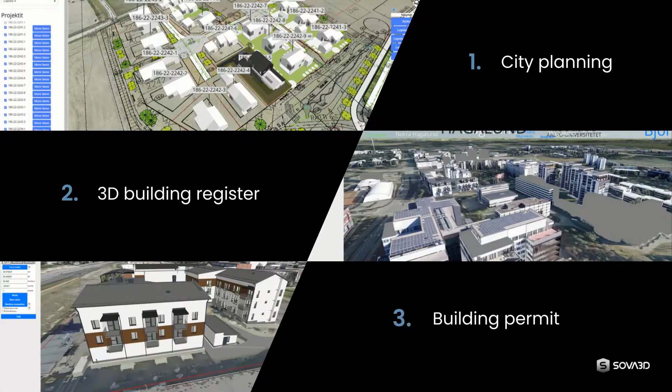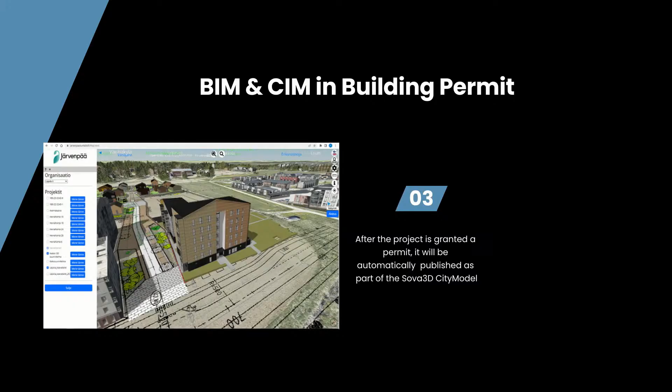SOVA 3D is a platform for city information modeling, and this is how the process works. First, apply for an e-building permit at Cloudpermit Service. Second, upload IFC models directly on the plot. Third, after the project is granted a permit, it will be automatically published as part of the SOVA 3D city model. Fourth, anyone interested in the city's development can follow the progress, like neighbors, investors, tenants, and others.

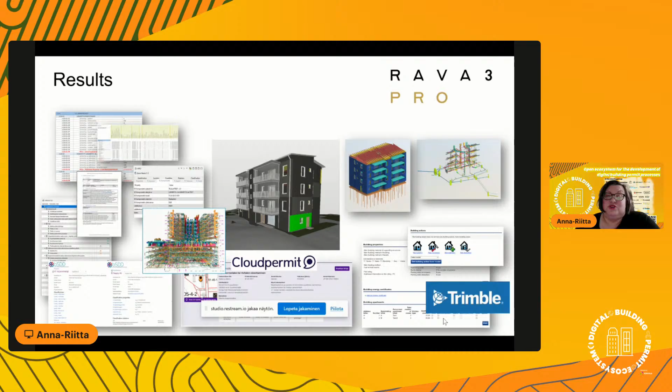I can say that the first step we did was recognizing that the working mode we had in Rava 3 Pro project, where we have all kinds of stakeholders working together - municipalities, specialists, software companies, construction companies, associations, all kinds of stakeholders that we have in this industry.

We make these results together, and we wanted to continue this collaboration work, because we noticed the work is not done yet, the old work - we need to develop more, we need to discuss, we need to learn each other's projects, we need to do things in the future step by step.

So we established this building permit ecosystem that Teemu mentioned earlier, and we have also opened it for global members. We will publish a newsletter also in English, so you can order this newsletter if you like - maybe some of you have already ordered it when you registered for this event, but it's still open, and you can join.

This has been really good for our processes, because we could continue this work together, and I'm hoping we will get more members, and get this kind of process culture that we have - joining together and being practical, while at the same time doing the research part, and working with the new building act with the ministries. Also these global connections, being part of the EU BIM Task Group, are very important, I think, for all of us.

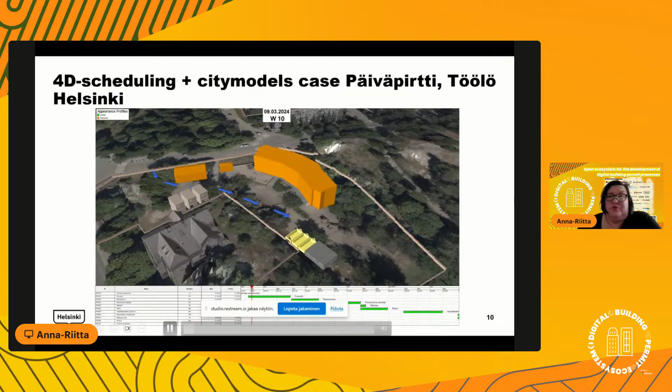So I will shortly show this material we have made. I will share this. This is the 4D scheduling part we made as pilots for communications to people, to municipality members who don't know about building - they are not building specialists.

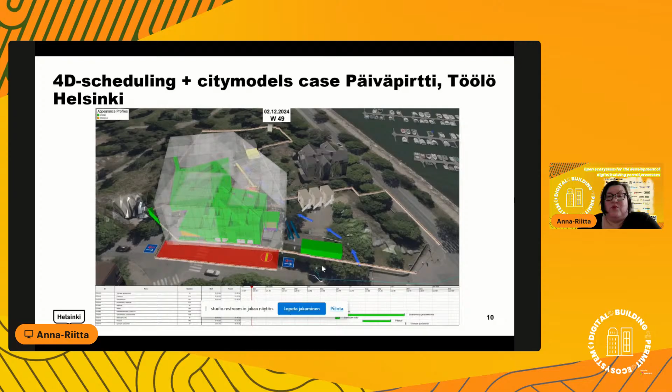This is something we tried for communications: through these IFC models and city models, we made this 4D scheduling about construction site changes, and also how the traffic will change, what type of movements it will make into the environment people are living in. This is the City of Helsinki Töölö area project that we are doing.

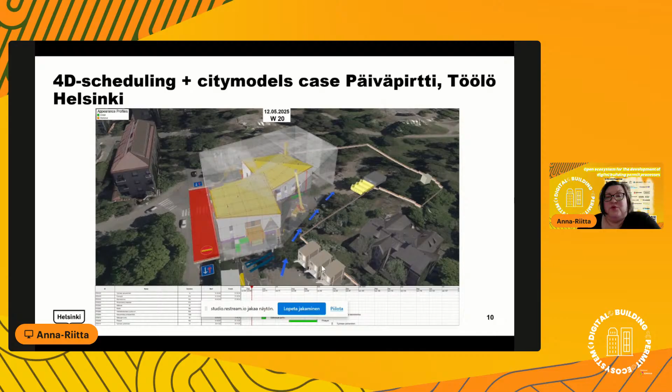All these kinds of practical pilots we made last year, and we will continue these types of pilots this year. You can watch this video later - I will send it afterwards.

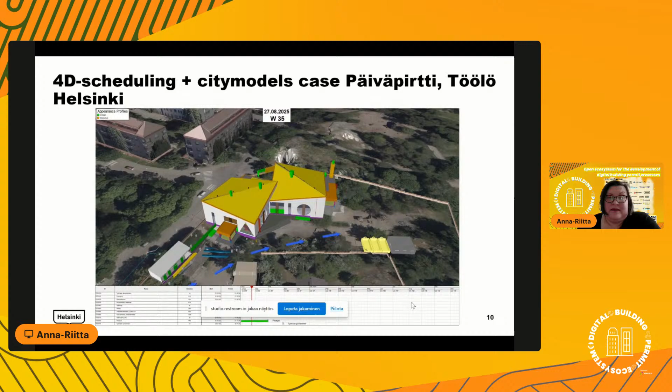We are also working on digital twin experiments in the Helsinki Urban Environment Division, on how we can more easily implement these IFC buildings into city model environments. There are also new softwares that have been confirmed, which we are going to use, and we will make new pilots from this digital twin perspective in City of Helsinki.

This is Tiina Talvitie's slides, which I promised I could show you.

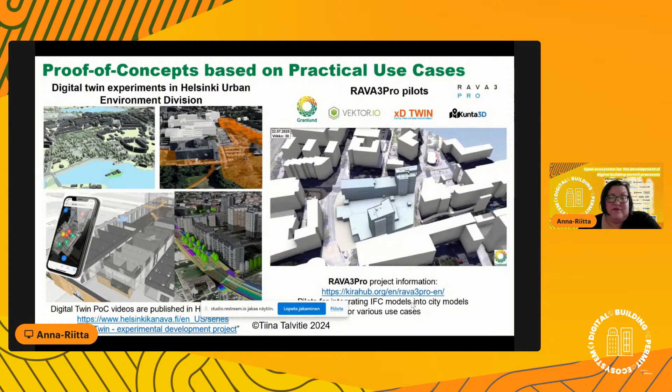For the next step of this project, this KYMP R3, we decided in Helsinki that we will invite other municipalities to join this implementation project, because we wanted to have this IFC files automatic checking process ready and for public use. We made this municipality group with City of Vantaa, City of Järvenpää, City of Hyvinkää, and City of Tuusula, and we are doing this implementation testing and process validation together with Cloud Permit and Solibri.

We already made the user interface and reporting design for these Rava 3 Pro projects, how it will look and what kind of functionalities it should have. We had this part ready, but Cloud Permit has by themselves made this concept ready in their software.

For example, we are checking accessibility - if we have requirements for a toilet or something else that needs to be accessible by wheelchair, the software will check this automatically. We just put the IFC files in, and we automatically get these checking rules out as a report. These checking rules are based on our Rava 3 Pro use cases, which are based on the regulations and law - what our law says about accessibility, for example.

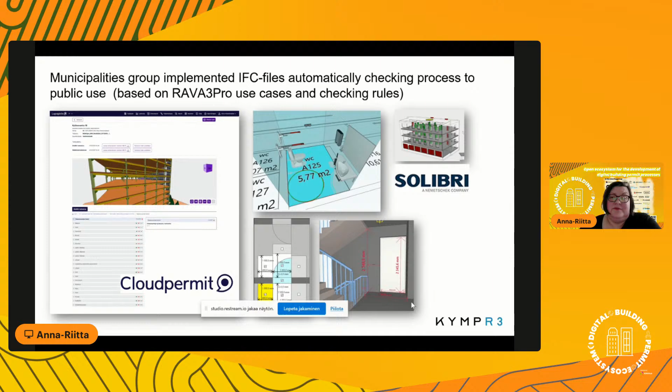This is quite new in Finland, and we are very happy that we have this ongoing and we could make this true now. This was our goal in the Rava 3 Pro projects, and now the first phase is ready. We're hoping, of course, that we will have other municipalities, and Trimble is also working with their municipalities on how they will do the same and use IFC files more and more, because the Building Act is going to be guiding us to do that.

Then we have the national next step, Rava 3.5, as we have used for the working name. We have a few cities, Järvenpää, Helsinki, Vantaa, Tampere, and Mäntsälä, whose building permit units are responsible for guiding the building permit process in this. And this is funded by the Ministry of Environment of Finland.

Our goal is this because the Secondary Building Act gave us extra content for the requirements, because there's information that we have to provide in machine-readable form via IFC files. So we have to make property sets, necessary codes, descriptions, pilot models, and of course a new process model for this update for the extra content.

I think we will have a first version next week for the public hearing phase, and I hope that we will have the pilot models ready by August, so we can use them. All of this will be open, free, national-level material. We have a very large group of stakeholders guiding this project, like we did in Rava 3 Pro. And we are also making guidelines for national use.

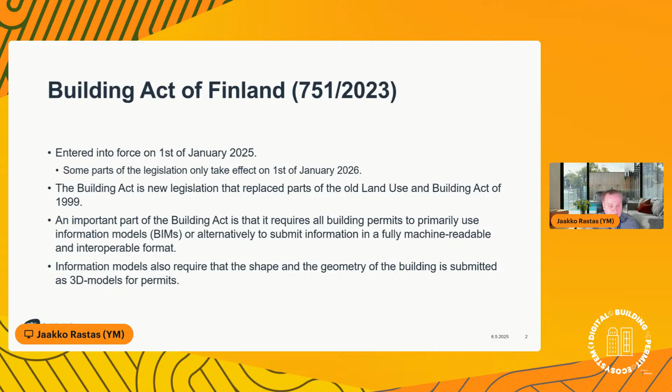Traditionally, the building industry has been very 2D focused, but now the legislation requires that we go to 3D. As you may have guessed from the 2026 timeline, Finland is a bit behind everybody else, but we're catching up quickly, and we hope to be quite modern in our BIM-based building permits. So a few words about building permits. Building data is created mainly in the design and construction phases, and that is why the building permit is crucial for gathering valuable data about the built environment.

Our legislation requires that when you apply for the permit with the information model, you also have to keep it up to date. So after you have finished building parts of the building, if something has changed, you are required to inform the relevant authorities. The BIM model, made for the building permit in an interoperable manner, effectively conveys the necessary information to the authorities. Our baseline is that when authorities ask for information about the construction project or the building, you only need to submit it once.

Currently in Finland you have to submit to many different authorities in many different phases, and that can be 14 to 20 or even more than 20 times that you submit the same information. So submit it once, maximum twice if something changes, and it should be all done. That is what we are aiming for. Getting the necessary information to the authorities facilitates their processes and thus also benefits construction projects. The tax office always has the correct data and can function correctly. The rescue authorities have correct information if something happens. This way we're forming different data repositories in the permit process, which enables wider utilization of the data.

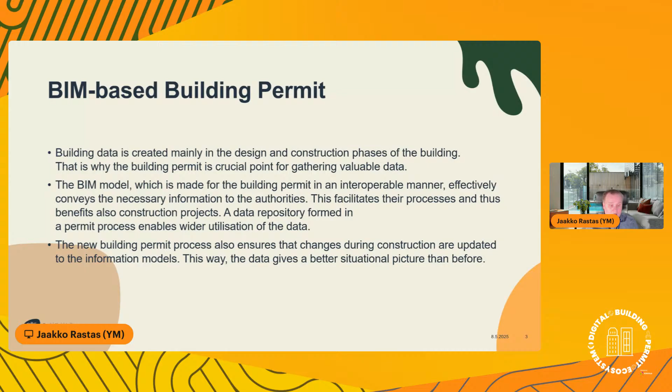The new building permit process also ensures that changes during construction are updated to the information models. So we should always have up-to-date information about our built environment, which leads to a much better situational picture than before. The Building Act regulates how to apply for building permits. The Act itself is quite simple on it, and it sometimes leaves many questions for construction companies, industry specialists, designers, and everybody else. As such, the Ministry of Environment is currently drafting a regulation concerning the required information and required formats of the information models.

Basically, in this regulation, we're going to take a look at what are the absolutely necessary core data that always need to be part of the building permits. And this new regulation is expected to take effect on 1st of January 26.

Currently the initial draft for the regulation has gone past the public hearing phase and is currently being finalized before being submitted to the EU Commission notification, after which it will be finalized in Finland, and then it will be given in the fall time, so it will take effect on the 1st of January. Due to the EU Commission notification process, the final regulation draft should, however, be ready already in this May or in June at the latest.

So I mentioned before, as did the previous speaker, that the building permit can also be applied for with just machine-readable information. And this is perhaps something that is going to be a bit different from the so-called old ways. We are very strict about what is machine-readable and what is not machine-readable. So we have a separate regulation about what machine-readable information is and what is not, and we exclude any and all information that is gathered, for example, with scanners, with OCR, computer vision, AI, or such technologies. And we have separate articles about that.

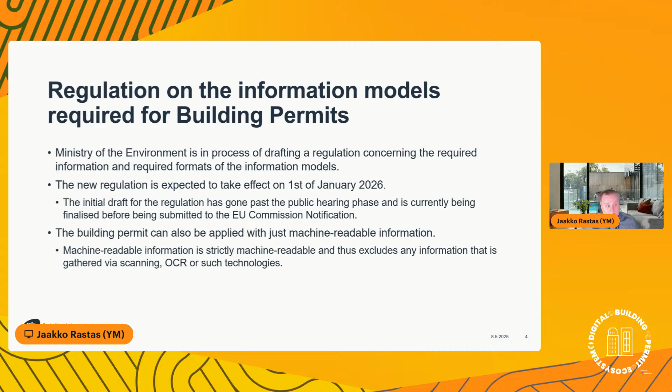As we have discussed today, is IFC required or not? The Finnish law itself does not require IFC. We require that the information model is in an interoperable and machine-readable format. And as such, the Ministry of the Environment has proposed IFC to be that information model format, so that not just the ministry but municipalities and other authorities in Finland will require the building information model to be in IFC format. Currently, in the draft regulation, we propose that the minimum version for IFC will be version 4.3.2, which is also an ISO standard.

We are fully aware that 4.3 is quite new, and we are well aware of some of the troubles because we're going for such a new format. But on the other hand, the vast and better documentation and the interoperability with infrastructure building indicate that 4.3 would be much better. For legislative reasons, we are unable to support older versions like 2x3.

Of course, after hearing my short speech about these things, you may be thinking, oh no, more codes. Are we going to have a similar situation as with Eurocodes or something else that is locked behind some kind of paywall, or are we required to use some random software? I'm happy to announce to all of our international guests that we are very, very committed to interoperability and open standards. So everything regarding our information models, alongside the previously presented Rava 3 Pro, all of our terminologies, the data vocabularies, aka the information models, as well as reference data, are all open and freely available to anyone. There are no licenses, there are no paywalls, so it's all open data.

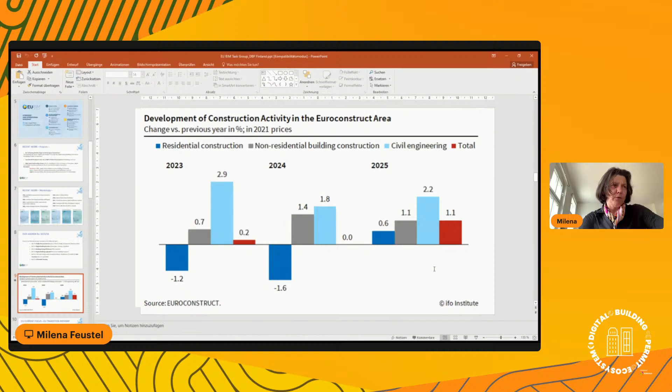Well, if we see what the EU BIM task group or the Commission specifically did for the digital building permits, I can only refer to the outcome of a study which was commissioned and procured by DG GROW. That's one of the Directorates-General, which is a member of our EU BIM task group, where we worked on the advisory group and actually did a lot to support this study. And this study had 3 pillars, and the second one was the one that really had to prove that the building permits across all member states should move forward.

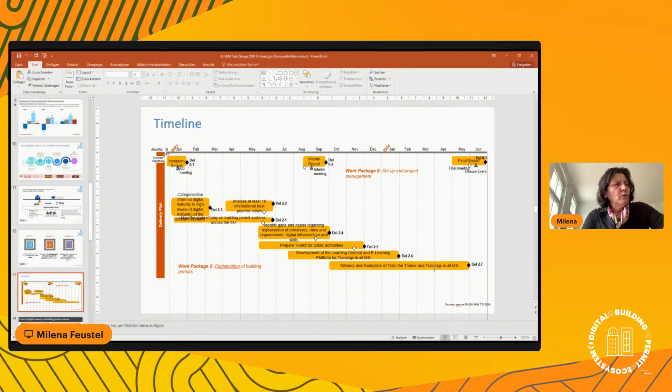So this is just one slide to show the different packages for this topic only, for the second pillar, because it was very ambitious, and it included different research on the current situation in the member states, or what we can do to move forward to get a common understanding. And one of the outcomes was to have these 4 levels. So now we have a common classification of the levels for digital building permits.

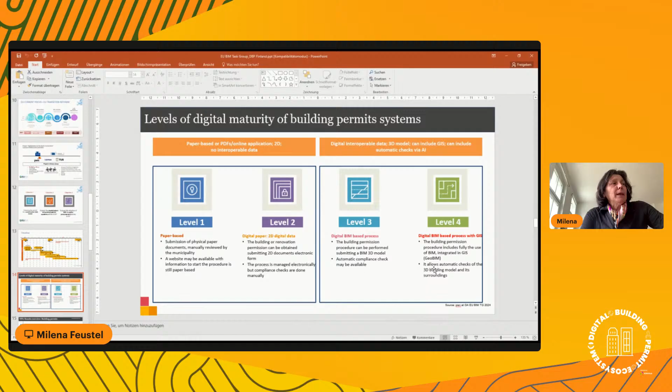And you might know already, level 1 is just paper-based, level 2 is PDFs and using electronic communication, and 3 and 4 include BIM. Level 3 would be only BIM and maybe partially automated checks, and level 4, the best you can get, is BIM and GIS, and then of course automated checks and reports. So this is what we have throughout Europe, and this is the list of the countries.

The 6 front runners in Europe are, as you might know, Austria, Estonia, Finland, Germany, Netherlands, and Spain. We also had some international front runners named here as well. And it doesn't mean that they all have level 4. I think some of these countries are still on level 3. But the good thing is there are front runners, and they can share their knowledge with the other countries, which is one of the things we want to stress and to profit from.

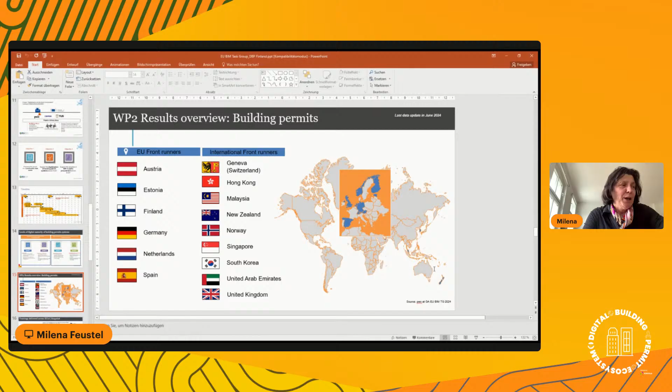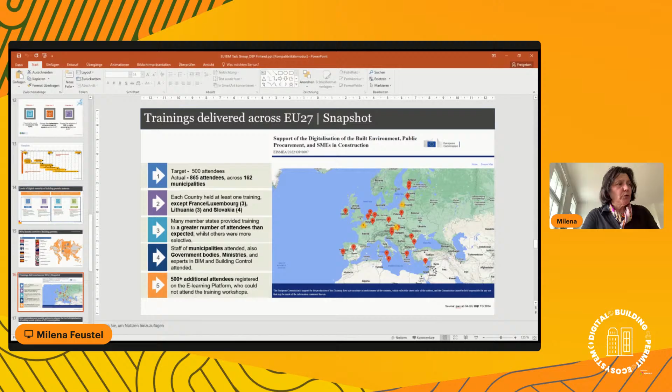And therefore, we did trainings across the EU. This is very standardized and basic training, so we all have the same understanding, and the Commission paid for those training sessions, and there is also a toolkit available, which I'll explain a bit later. But first, I want to share with you the main conclusions from this very ambitious project, and it was quite clear that an electronic system should be, of course, at the core, the platform for digital building permits.

But other conclusions, for example, financial support for the municipalities for getting good software and hardware, should be very important and should be considered too. Then there should be some kind of a vision or a target. And here the Finnish approach was specifically quoted, where Finland's Ministry of Finance and Environment has launched a project, the project we heard about, which aims to adopt BIM across 33 municipalities. So you had a very scalable and successful approach, which is a recommendation for all European countries. So let's see how we can follow your advice.

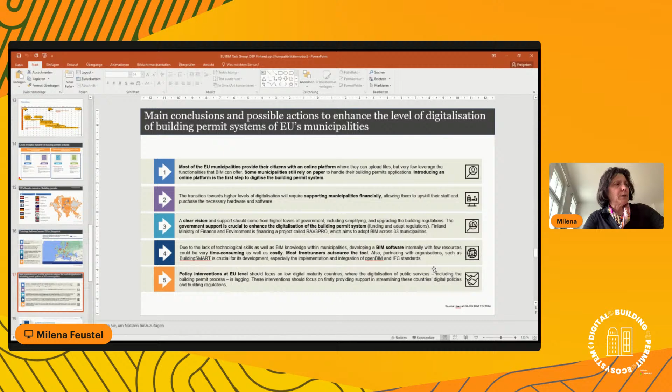The next recommendation is open standards and software requirements, or standardization of such requirements, so that we don't have to start from scratch every time. And the final conclusion was that EU policy intervention should go only for the least performing countries, and the others should learn from each other, which is quite plausible. I mentioned the toolkit, it's available. I'm sure in Finland you don't need it because you're an advanced country, but I think it's quite helpful to have a general understanding and, as I said, a basic tool for everyone.

What the Commission also does is it supports financially and also in kind these very important projects where we work on research, on new tools. It's quite interesting to see how the universities or the technology and research companies want to support this very important part. I recommend you go on these home pages and check the results.

It's quite promising. So from our point of view, from the European BIM task point of view, we have these four sectors, and we want to combine them and make the best out of it. So when it comes to rules and processes, we think there should be a simplification process to get the basic requirements and rules for checkings and for a construction platform and for checking tools. And I think if we all have one simple setup, which can be easily expanded or adapted to the national requirements, but a simple core setup, that would help a lot.

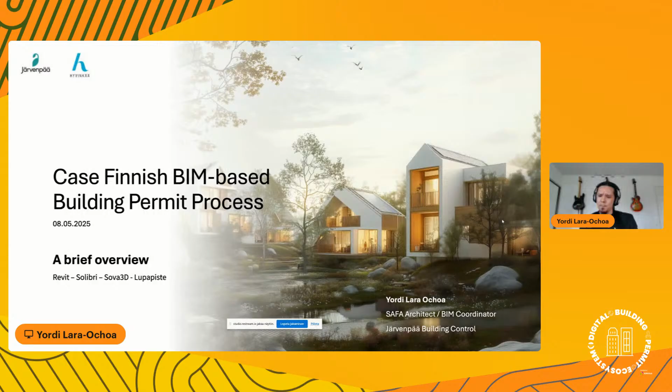The overview that I will show will be a small project. It will be a typical wooden house in Finland, from the very start to the end, until the point where we want to implement this technology.

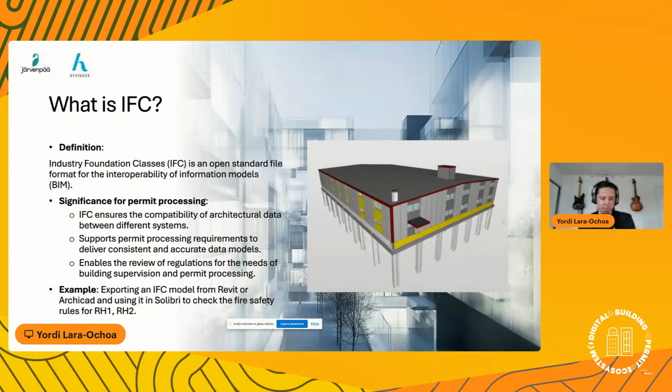Of course, now we're all familiar with IFC - we know what it is, but IFC is the heart of our process. So everything depends on how good the IFC model is made. And here I emphasize the quality of the property sets, the quality of the geometry, the quality of the materials, and of course that there are no inconsistencies - so as clean as possible.

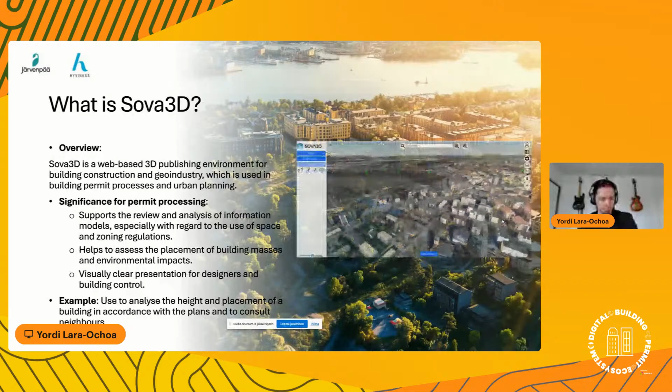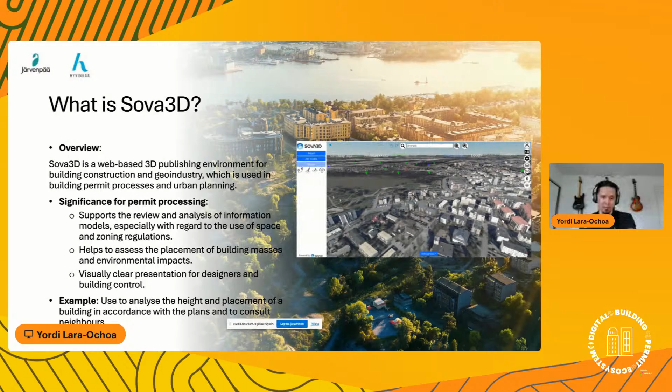So the second thing we saw early in the presentation was SOVA 3D, which is our 3D mapping interface used extensively here in the municipalities that belong to the pilot project in Finland. SOVA 3D is, let's say, like the eyes of the project. If the IFC is the heart, then SOVA 3D is like the eyes, because we can see with precision in 3D where we are and where the plot is, and so forth.

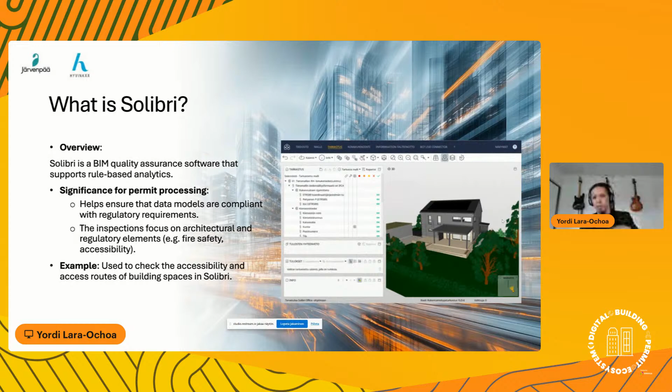Then Solibri is like the nerves, and let's say the brains - all the nerves and instructions that come from the head. So that's Solibri, at least - I'm making a bit of a physical metaphor here. Solibri might be a familiar program to some of you; it's used mainly in clash detection details of the project. But here in the building permit process in Järvenpää, we've kind of hacked it. We use it to provide a very precise analysis comparing the rule sets, what's permitted, what's not permitted, and then we give back reports to the designer so that we can go forward in fixing the pending things. This process flows much better if we do it electronically with Solibri.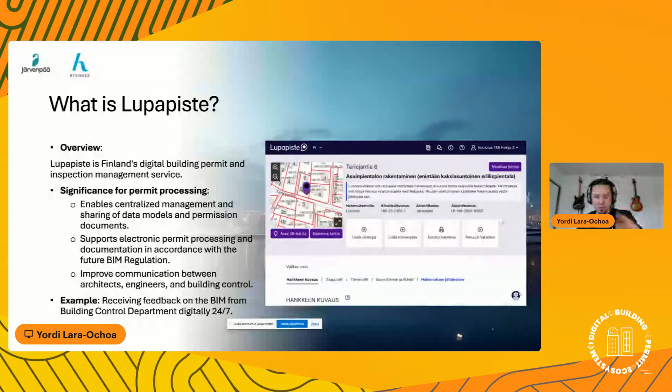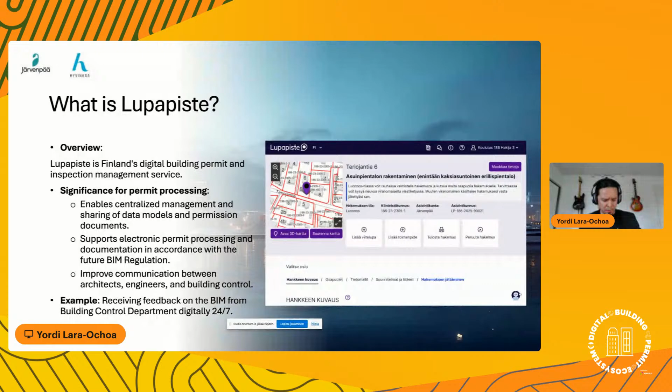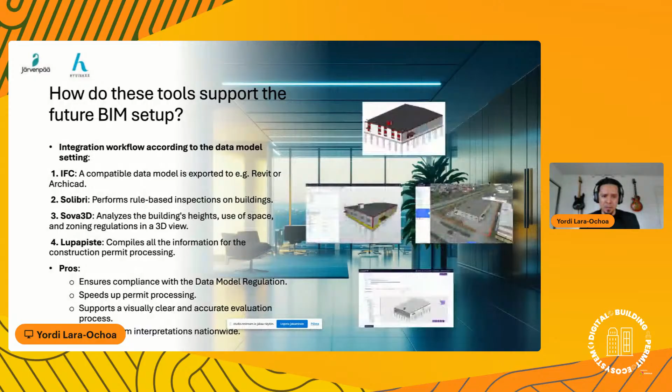Then Lupapiste - let's imagine that it's the body. You have the eye, you have the heart, you have the brain; Lupapiste is the interface that we use online. I will go deeper into this in the second part of my presentation. So those four elements are what we use extensively: IFC, then Solibri, then Sova3D, and then Lupapiste. Those four elements are, in a nutshell, what we use here.

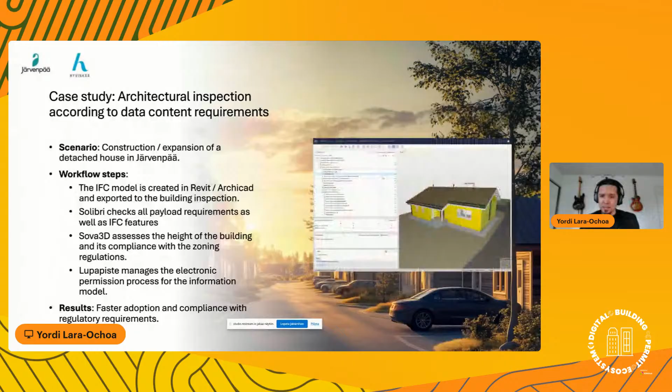The case study, as I explained, will be this small house. And then the key benefits and all these kinds of advantages - I think my colleagues already explained them, so I'm going to skip them now.

I'll skip the challenges since they've already come up repeatedly. So let's go right into this very important thing: the property sets.

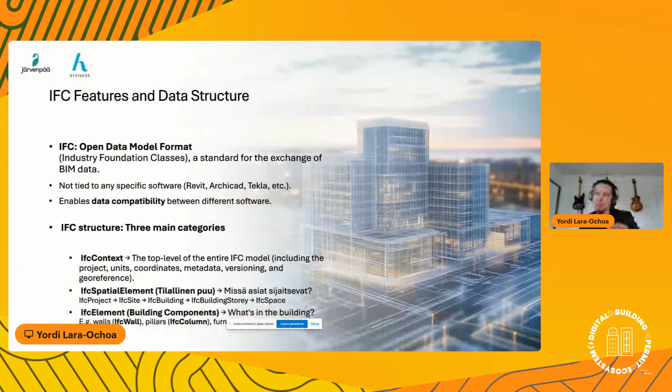For those not familiar with property sets, it's the core—it's like the blood cells of all the projects. If the property sets are well done, then everything flows. So we need to know with precision where to put those properties in the IFC model.

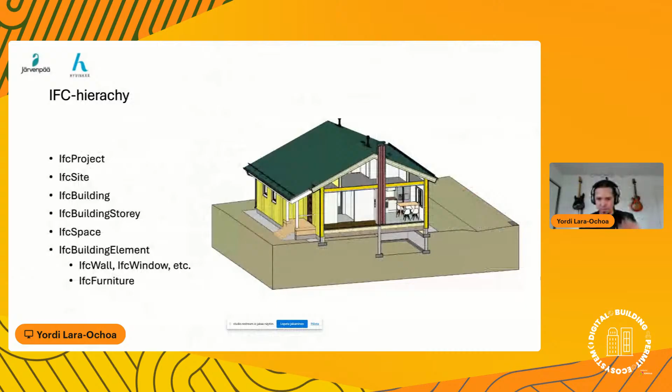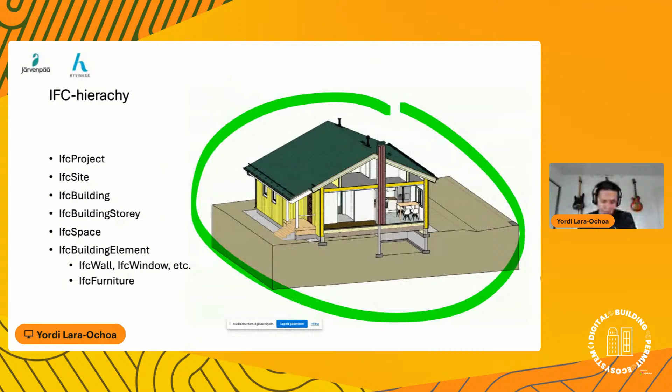For that, the IFC hierarchy is super important. For some it's a familiar thing, but for those who aren't, I can show this graphically super fast. In the IFC hierarchy, we have several levels.

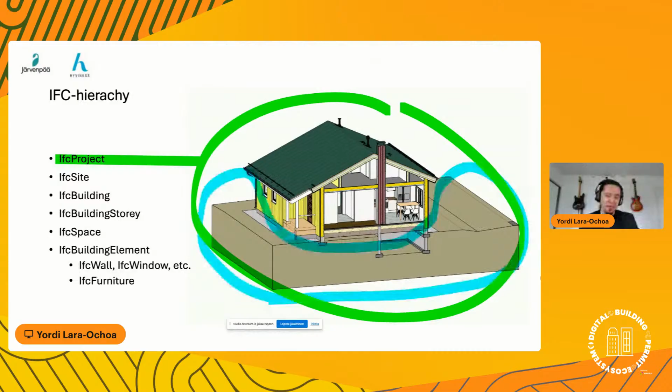The uppermost level is the IFC project level. Then we have the IFC site level, which is the piece of land, the plot. Then the building, then the stories, all the floors, then the space. We're going from the general scale to a smaller scale, going deeper into smaller elements.

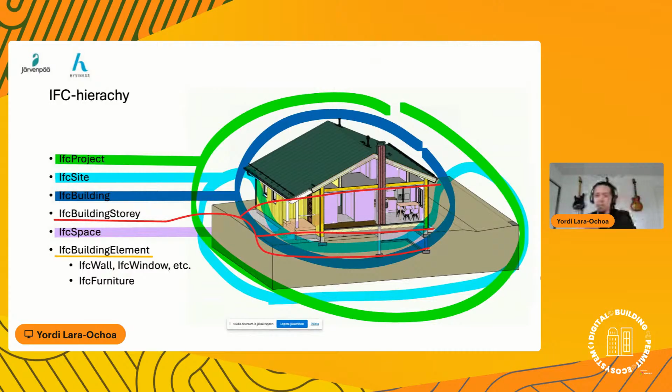At this point we start with the concrete elements, because the previous elements are abstract—you cannot touch the story, the space, or the building. It's like an entity with no matter. But from the IFC building elements onward, everything is physical, like the walls or the windows.

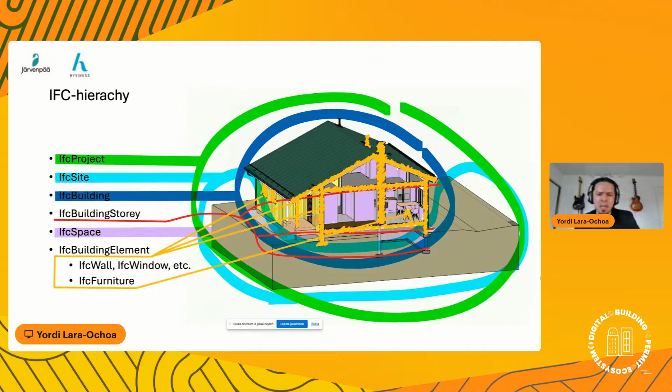I want to make this very clear: all the elements like the foundations, the floors, the ceilings, the chimney, all the furniture—these are all in the lowest IFC level of the hierarchy. So it's super important to know where the information goes; we have to deploy it with precision, whether it's IFC site, IFC building, IFC space, wall, or door.

You see, it's the same hierarchy, but now as text. And yeah, basically that's what we do.

Now I'll show super fast one simple element: the load-bearing capacity of a wall, for example. The type of information we're putting here—in Revit it's a parameter, but in the IFC world it's a property. It's exactly the same. In a moment I'll show you how we can do it in Revit. So the property is 'load bearing,' and the type of information is a Boolean.

So it can be a yes or no, false or true. Then we can get a collection of properties into one group—that's a property set, an IFC property set. For those not familiar with this, it's now mandatory to get used to this terminology.

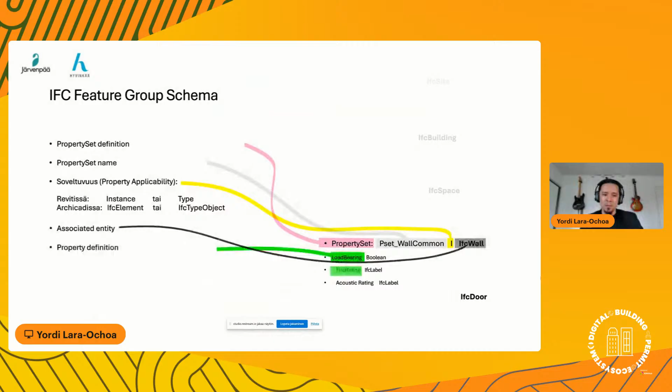After you have your property sets done—I'm going to skip this, these are only the parts, how they are named, the parts of a property set. But let's go really quick because I've already explained them.

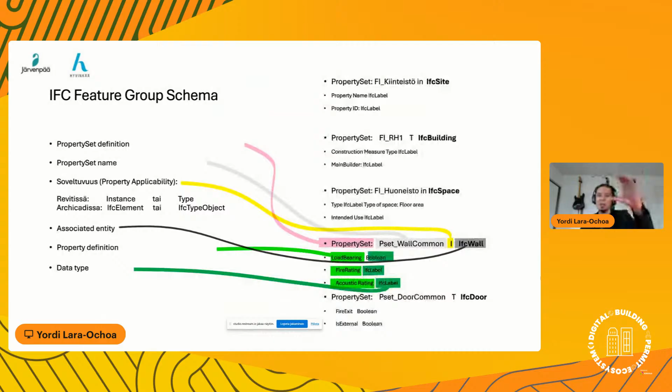After this, you have a collection of different property sets, for example in the IFC site, or in the IFC building, IFC space. Everything will have different property sets. Having said so, we have to place them.

After this, you will succeed in creating property sets. The principle is exactly the same for ArchiCAD, Revit, Plan, Vertex, or whatever. The conclusions, I think my colleagues already explained. Now I'll jump right away to Revit.

The proper way of placing properties is through shared parameters here in Revit. For example, I will go to shared parameters. Here in the shared parameters, I have already made a collection of several aspects of the project. The relevant aspects of the project will be deployed here.

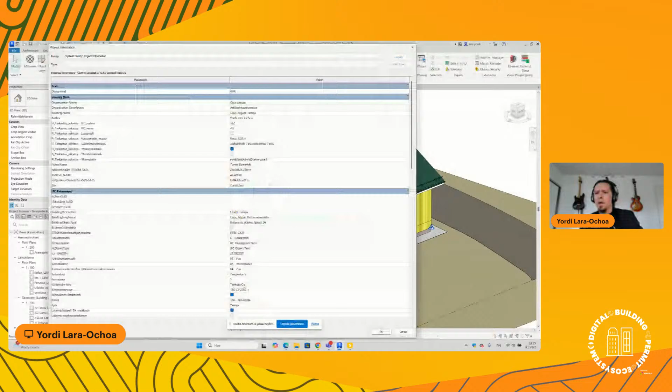It's exactly the same. So after that, we will place them, for example, in project information, and then we have all the data gathered in a certain place. For example, the check boxes - they are the booleans. So this is yes or this is no, and so forth.

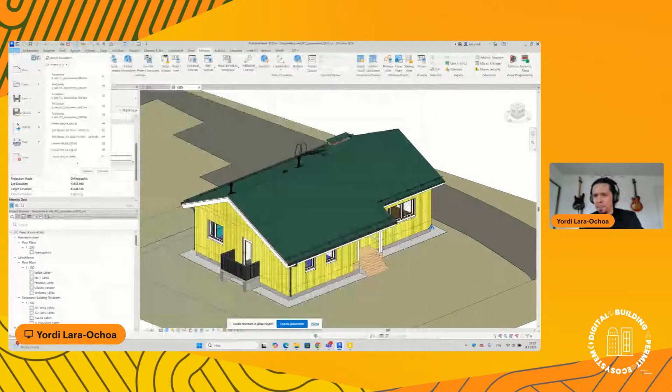Then after we have this done in the export interface here in Revit, in the IFC window, it's super important to assign the right parameters in order to export them. Less is more - the cleaner the information, the better.

So having said that, here we have the property sets. I personally like exporting the IFC common property sets because you will have the common wall, common door, common floor, and there are important values that will go there. And also, this is very important, the user-defined property sets - these are the custom property sets.

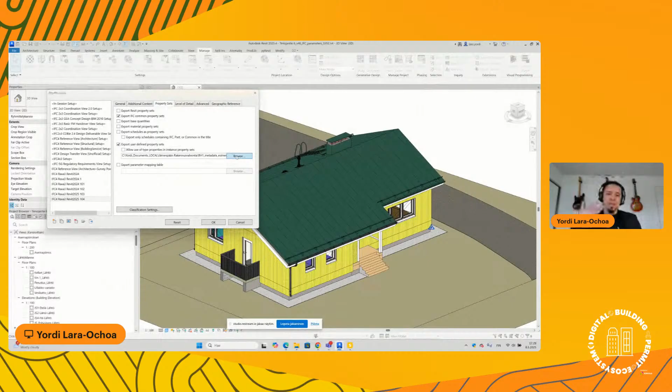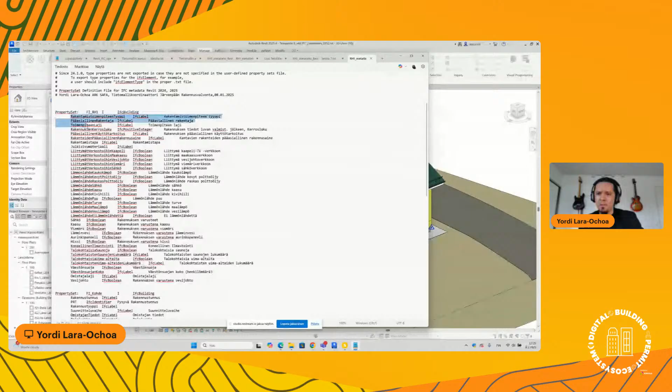So we will see, for example, if I open this file, which is the reference file, how it works. We have exactly the same structure as I explained: the property sets, the name, the level of the property set, and all the properties inside this group. Same with, for example, the PRT code, or the designer, or where the building is located. So all of them have a certain IFC hierarchy level to be deployed to.

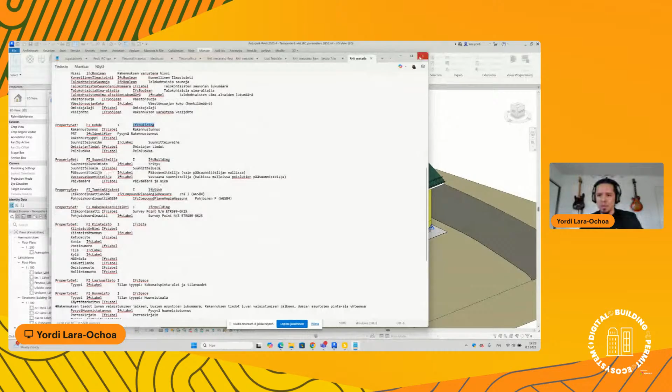Then after this, when we export to the project, we go really quick to Solibri. Here we have the IFC exported, and then we can check really fast that the properties passed from the Revit environment to Solibri.

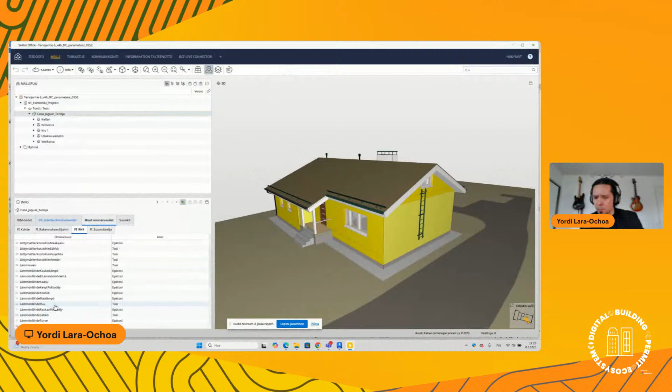For example, here we have the FI_RHI, and if we see, yep, this is how the house is warmed - so it's electrically warmed, or it doesn't have a wooden place or a chimney or something. So all the values are here. Everything passes properly using this technique.

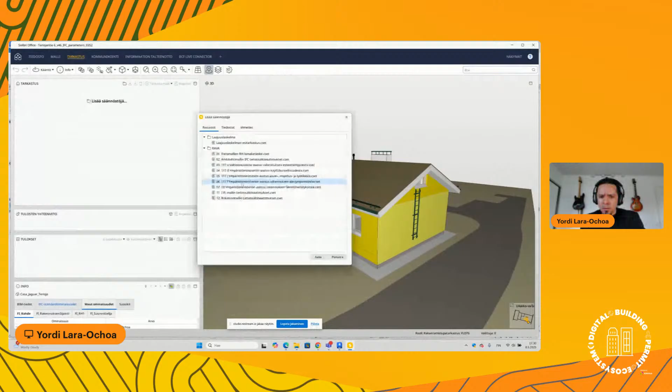Then after this, we can make a very quick check so that the rules are correct, or if there's something wrong with the model, then we can fix it. I'm a bit over time, but I'll try to wrap this up in 3 minutes, something like that.

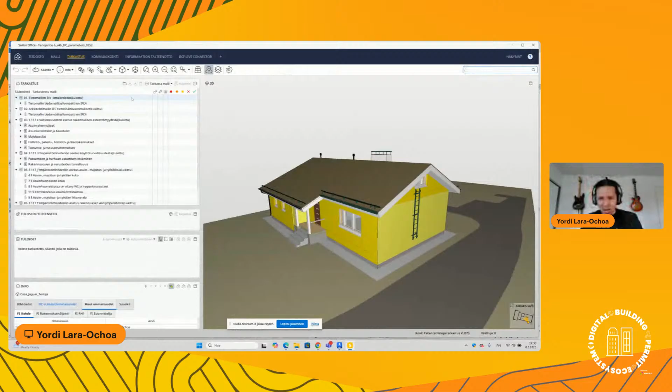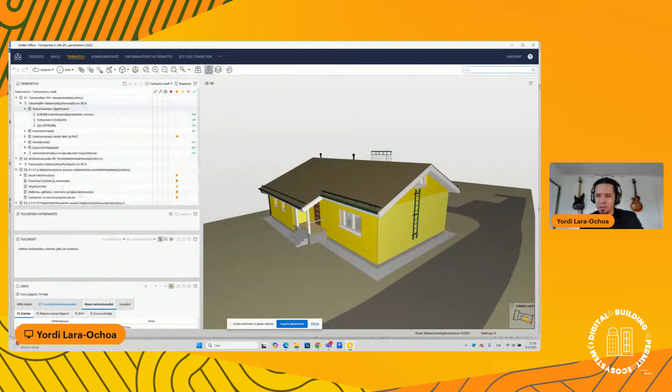Sorry about that. So in the Solibri environment, once we have loaded the rule sets designed by the RAVA3 group, we will check under the permit rule sets which aspects of this house are correct and which are not correct yet. For example, some of these in the beginning are okay, they are correct, but some others are not that okay, not that in shape. So this is where we have to fix certain things.

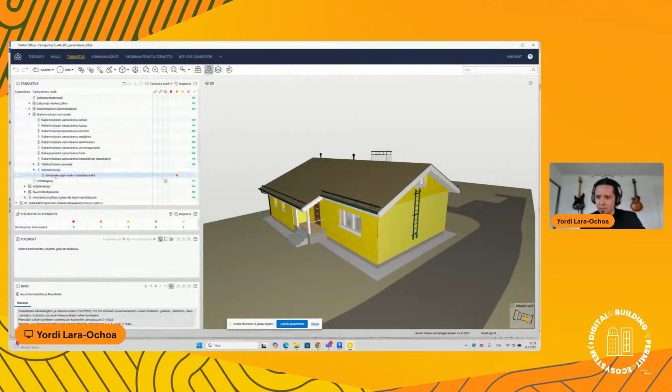For example, if we want to check what's wrong with this, we will create a report from Solibri and send it to the designer so the designer can get the observations, and then we will get the fixed model back to the authorities.

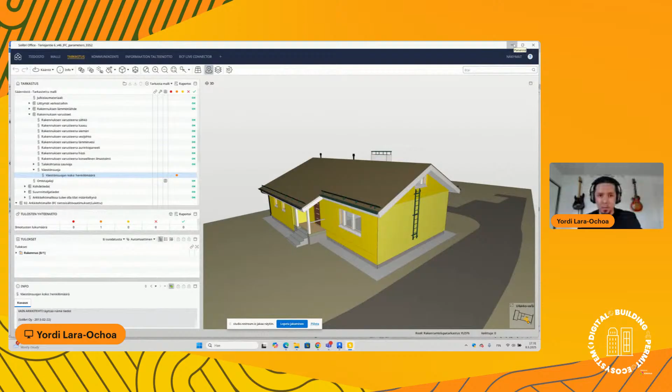Then after this, I will show you really fast the Lupapiste environment. This is the building permit interface that we use in Finland.

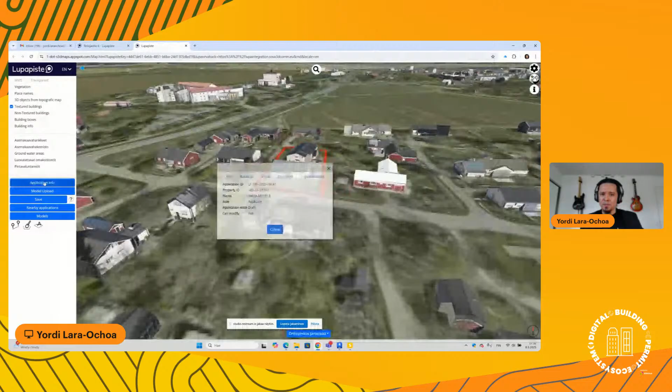So here we will see that we have several projects, but the project I am interested in is this one, and this is super important to know: Lupapiste gathers all the information. Everything will be deployed here, like for example the location of the projects. This is actually the SOVA 3D interface. So if I go here, since the project is correctly geo-referenced, that means that the project is located in the plot in the correct place around the world.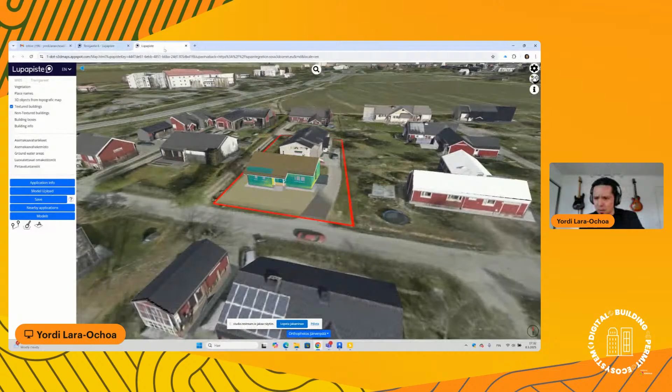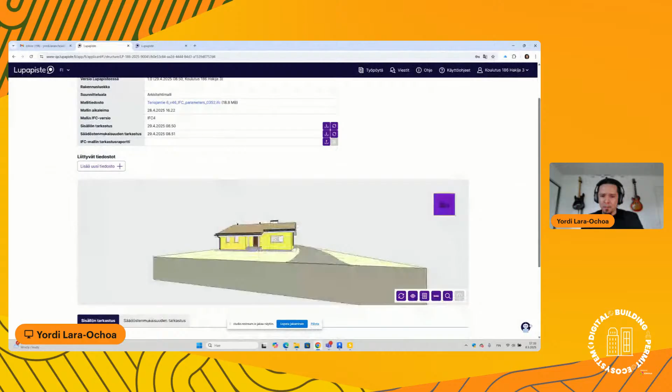So now it's here. After it's correctly geo-referenced, we can go here, and here we can upload our model, and when the model is uploaded, then it will automatically... okay, this is still in testing mode, not all the features are available yet, but that's what we are doing in the pilot group. We have here a visualizer, which is quite nice, with several different options. For example, we can see different levels and so forth, or elements, depending on what you want to see.

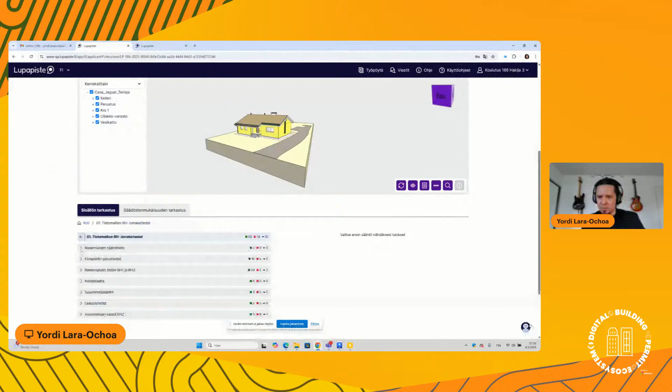And then the most important thing happens here, because Solibri is working in the background, and we can see that we have already made rules that check that certain things are okay. For example, this is the georeference location, and there are different aspects of the plot, the piece of land, or of the building. So some of them are okay. I think 63 passed, but 13 kind of failed, so I have to fix them.

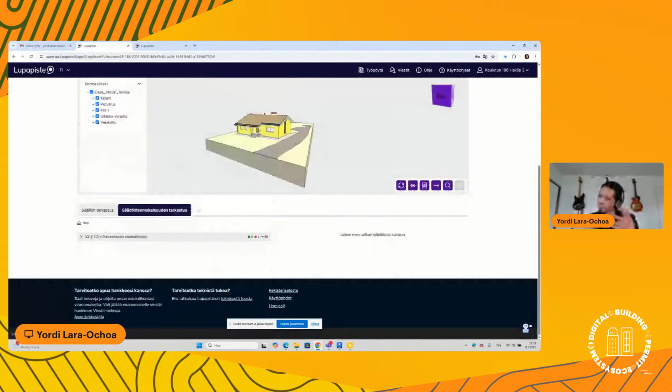And yes, from the very beginning, from the native model to the Lupapiste IFC model in this automatic permit checker, that's how the process is done currently in Finland. I am responsible in Järvenpää for checking that the models comply with these requirements, and if something goes a bit wrong, then I can guide the client hand in hand through the process so that everything works fine.

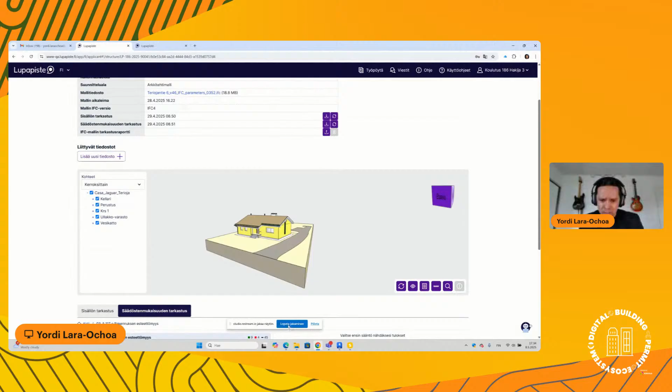So that's pretty much it from my side. Sorry, I am a bit over time, 4 minutes over time. I'll stop sharing my screen. Yes.